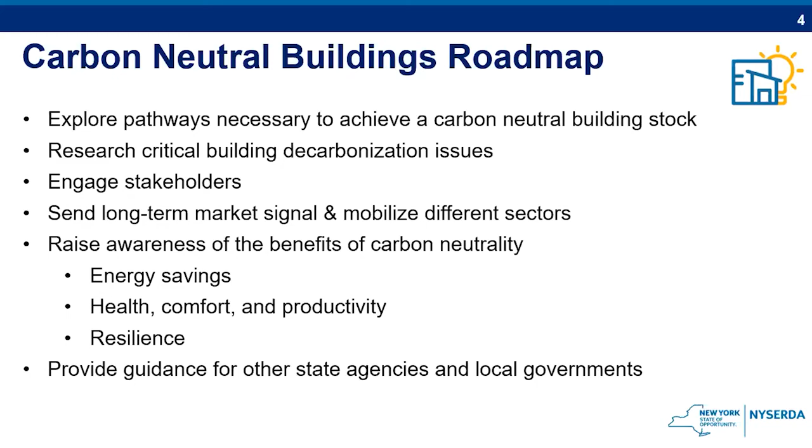We do engage stakeholders. So far, we've had more than 20 stakeholder input sessions to give us input into the development of the roadmap. And as we finish our first draft of the roadmap, we plan on going out with a roadshow later this year to share the roadmap and the key learnings. And our goal is to present the roadmap to the Climate Action Council to drive New York State policy early in 2021.

The roadmap scope, in terms of what we're looking at, includes new construction, as I mentioned, and existing buildings. We are looking at a shift from net zero buildings to carbon neutrality and what that means. So we're figuring that out. And we've picked multiple sectors to start with. We picked single family homes, multifamily buildings, mid-rise and low-rise office space, and within higher education, we picked classrooms and dormitories. We picked these sectors for a couple of reasons. They represent significant portions of the existing and new construction building stock. And also, we believe that they are building typologies where carbon neutrality is both technically and economically possible at this time. So they make good starting points.

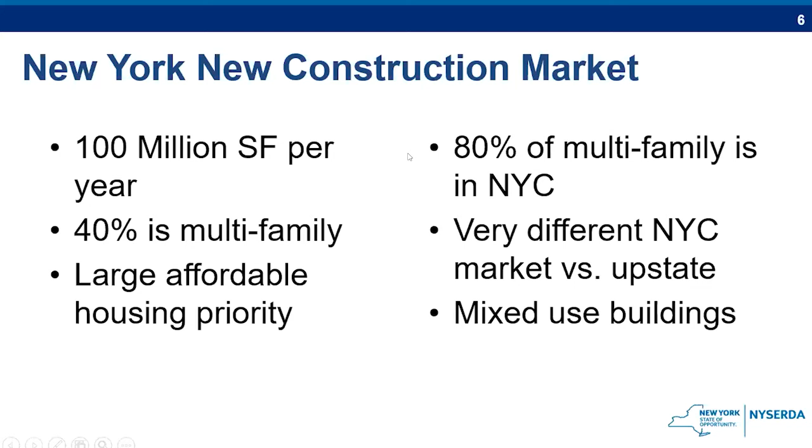We have a shortage of affordable housing, specifically in the Metro New York City area. 80% of our multifamily buildings are in New York City, and about 2/3 of those serve low-income communities. We have a very different market between upstate and downstate.

Upstate, where land is relatively inexpensive, you will see low-rise multifamily units being the primary form of construction. And then downstate, you will see a mix of high-rise and mid-rise, and in certain areas, mixed-use buildings where you have retail and other types of tenants on the bottom floors, and then housing on the top floors. So it's a very different market depending on which part of the state you're on.

Given that multifamily buildings were such a large portion of the new construction market, and given that we could prove not just that carbon neutrality was possible, but what it meant for people to live in a carbon neutral building, we decided in the Buildings of Excellence competition to focus on the multifamily space.

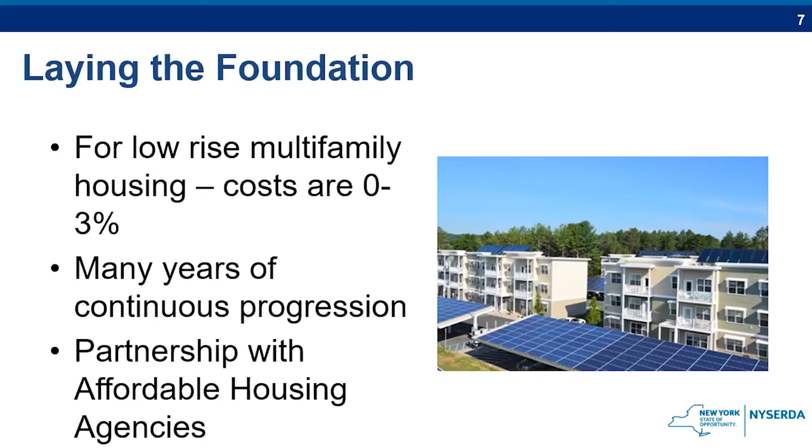So this is an example of a project in upstate, 4-story unit. This project incorporated PV solar and solar thermal, along with heat pumps and instantaneous hot water. The cost, at least in upstate, for a net zero building or carbon neutral building are in the 0 to 3% range. Not for your first project, but more like for your third or fourth project. There is a learning curve, but teams have shown a way to get costs down and improve the mix of technologies that they're using. So that happens to be a project right near Albany.

We have been investing in this area for many years, working with partners to improve our focus in terms of what we're investing in, and the construction methods that the market has been using have been improving. So it's not just incorporation of renewable technologies, but we've made significant improvement in the building shells, and that's one of the key areas upstate where the heat load is such an important part of the building.

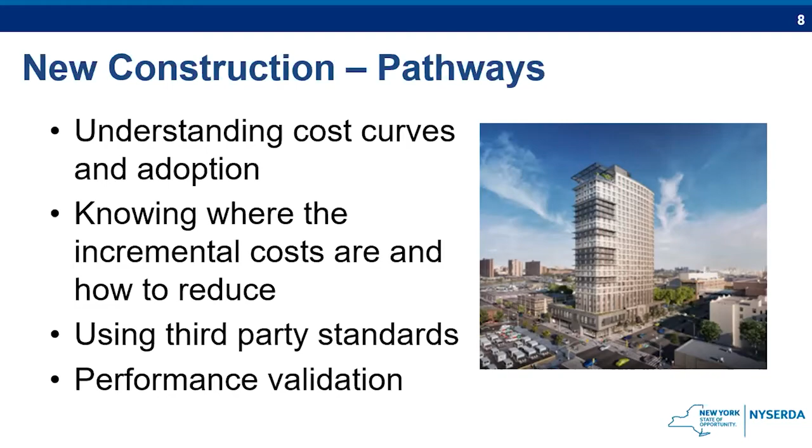Downstate, we've had more challenges with mid and high-rise buildings. The technologies are pushed in some cases to their limits. Projects are more expensive to begin with, so there's more risk associated with moving down the learning curve. We are using third-party standards, and we do performance validation. So we validate the results to make sure that the results that people are claiming are actually being achieved.

One of the things in our Buildings of Excellence competition that's really important is that we are evaluating the results of our partners. We're tracking the technologies. We're looking at the costs in comparison to traditional construction, and we're sharing that information with the market. So in the area of lessons learned and applying what has been done in other industries of construction, here are some of the things that we've learned.

We've learned the value of panelized exteriors with air source heat pumps. We've seen a growth in modular projects, mostly in low-rise and mid-rise. We're looking at low global warming potential refrigerants and low embodied carbon. We've actually begun to see some high-pressure carbon dioxide systems in some of the Buildings of Excellence competition winners.

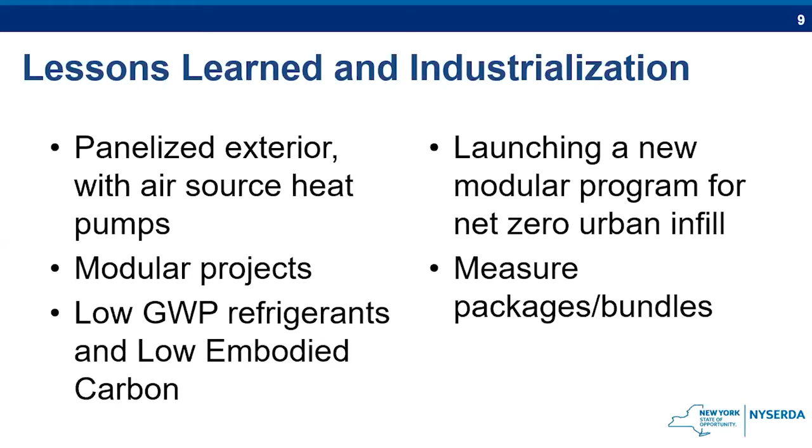We're launching a new program to focus on net zero urban infills, and that would be one of the areas where we see growth for modular. And then we're developing measure packages of bundled measures so that we can focus on getting scale for provable packages of low emission, low energy performance.

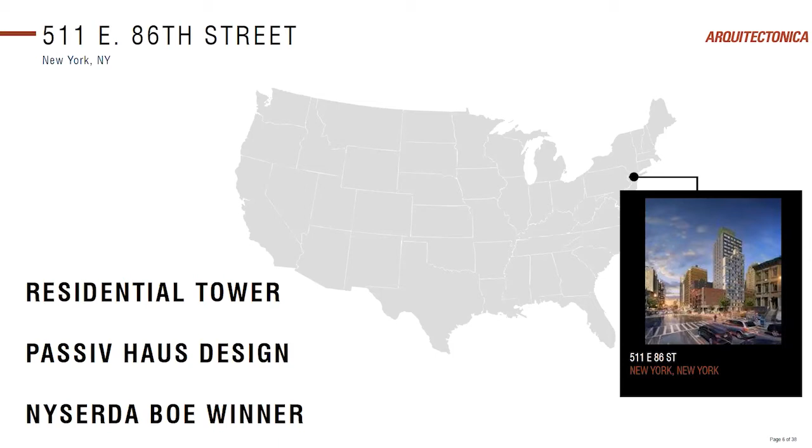So it's hard to really get that building, but this is going to be one of the buildings we're going to talk about today. It is one that we're very proud of here in this office at Arquitectonica. It is a residential tower in New York City. It is a passive house design and is a NYSERDA Buildings of Excellence winner.

The success of every project is a direct relation of the project team. From owners, designers, and contractors, each member of the team has to have the project goal in mind. If not, it doesn't work. From the design drawings, making sure the QA/QC on the design drawings is very tight and very coordinated, to the QA/QC in the field. It's very important.

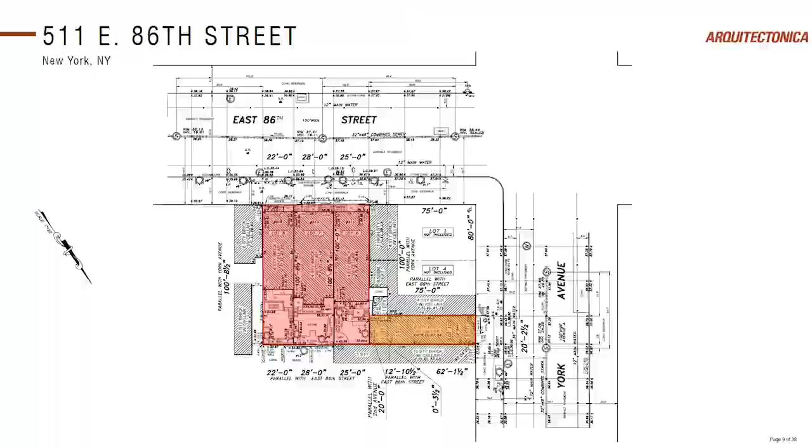The survey of the site: it was 3 former separate lots with low-rise, inefficient buildings on them. The owner approached us to combine these 3 lots and make a tower. As we started the project, the owner actually purchased the orange lot you see here, so it created an interesting dilemma for us. This additional lot, although we always welcome more project or more scope, is a sliver building lot. So when we first started designing this tower, it was on these existing lots, and we always designed from the inside out.

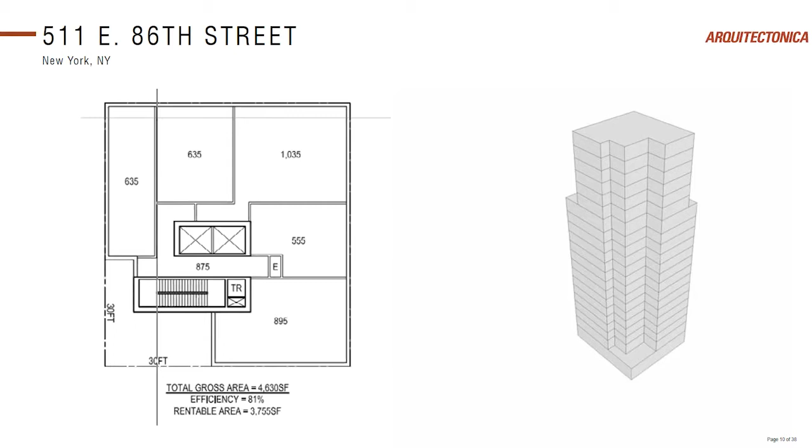Typical massing extrusion. We usually start with New York City zoning. What the New York City zoning told us about this lot is it could be 230 feet high above the base plane, has mandatory quality housing, and an optional bonus 2 FAR for inclusionary housing. This is the first hardline approach we did on the project, very, very early. You notice here, the original scope is not including that little L. When we added this lot, we tried to keep the centralized core where it is right now. And as you see, as we go through the plans, it really didn't move too much.

As we were in the conceptual phase of this project, we started to list all the requirements. As we start to draw, what are the requirements for the project? And here are a few. We have the United States Access Board, New York City Building Code, New York City Planning, Multiple Dwelling Law, contract. And as we started going through it, the owner started piling on more items to include, and included passive house.

So although we never did a passive house project in this office, we're familiar with passive house standards. And we also noted that we want to go for a NYSERDA Buildings of Excellence competition. And also what he added, as you can see, New York City Department of Finance on the left, he also added that we want to go for the 421A tax program, which then triggers UFAS units, HPD requirements for affordable units.

So all this piled into the building, and we needed to educate ourselves on passive house. So what's the first thing I did? I took a walk over to the Strand bookstore in Manhattan, and I bought a couple of books. Several of us got passive house certified. I wasn't so lucky, so I had to do it from a book. And this is what was the yield of the project. Not taking you through all the design process, which took months, almost 2 years from start to finish.

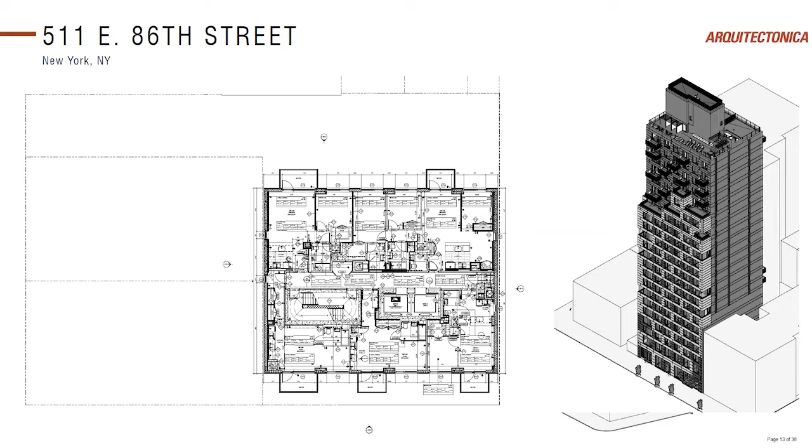This is the result. Here we have a typical tower plan and a typical tower axon. As you can see, the core is centrally located to make sure the floor plate is very efficient. As you know, real estate in New York is very expensive, so every inch is rentable. And a typical tower upper plan with our facade undulating, and you can start to see where the zoning setbacks come into play and where we start to implement dormer law, which allows you to articulate the facade in a certain way to make it a little interesting. So it's not a real start and stop from the base of the tower to the upper portion of the tower.

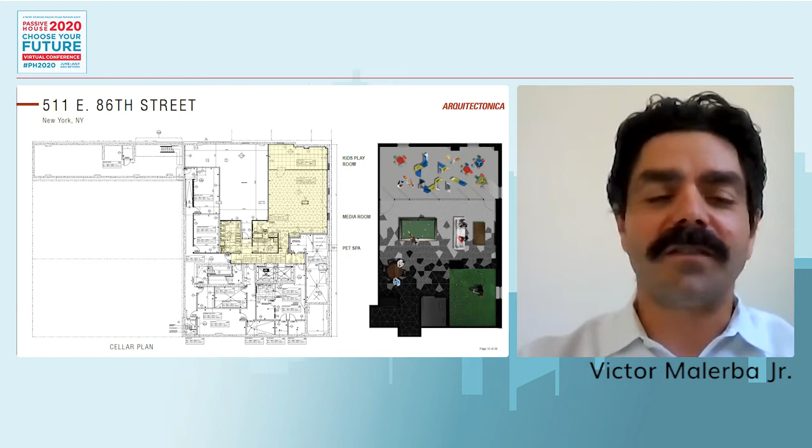Getting into the program a little bit, our cellar level included some amenity space for the residents, which needed to be included for quality housing. We have a media room, a kids' playroom, and also a pet spa. So any occupant of the building who has a pet can come down here and wash their pet. As we can see in some of our buildings, the amenities are getting more and more specific and more interesting.

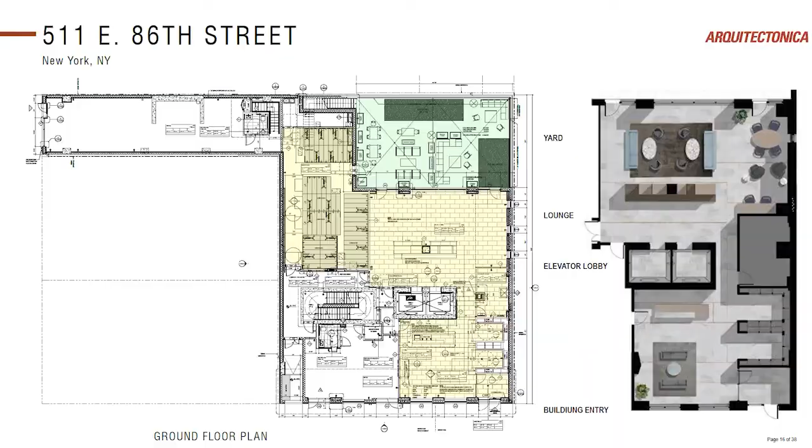The ground floor, which is our building entry, houses our entry lobby, our mailbox area, our concierge desk. And we did something interesting here. Since the core is located centrally, and it is a very tight footprint, instead of creating the concierge desk more towards the front of the building, we opted to wrap around the core and have the elevator lobby on the back side, which created a nice little lounge and also incorporated an outdoor yard area with some bike storage, which was mandatory for this project.

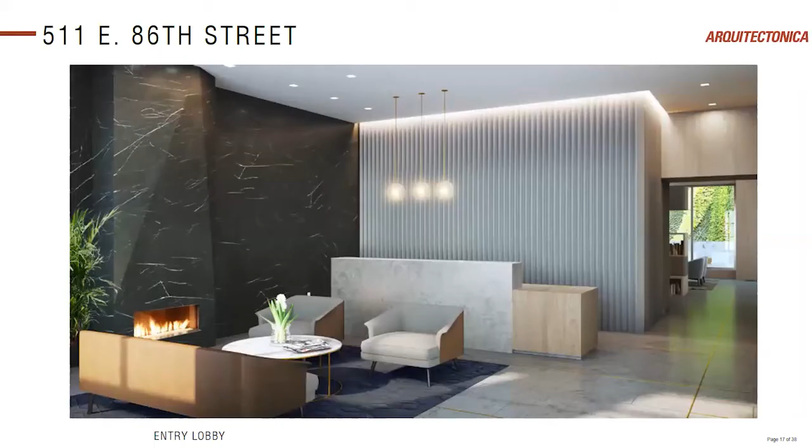And here we have some renderings of our interior lobby. Unfortunately, this project is still in construction, so I don't have any final shots, but I'm hoping they look like this. As you see here, as you enter, we have a marble wall, and then you wrap around the back to get to the elevators. So you don't see where the elevators are. They're hidden in the back, and it creates a nice kind of living room feel to this building as you enter. Very homely, especially because it's a residential building.

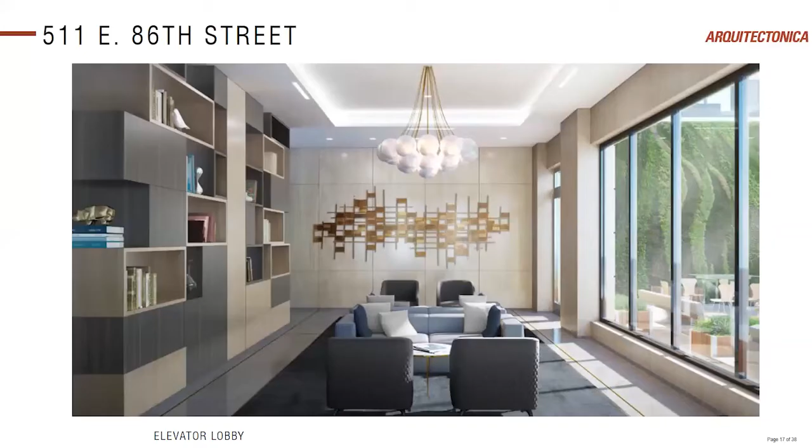And behind those elevators, the elevators on this slide will be behind the bookshelf to the left, we created another lounge area, which gives occupants a place to sit and repose, and also opens up to the outdoor garden. Our second floor plan houses the start of the residential units, and also another reading room or slight lounge to the back of the building.

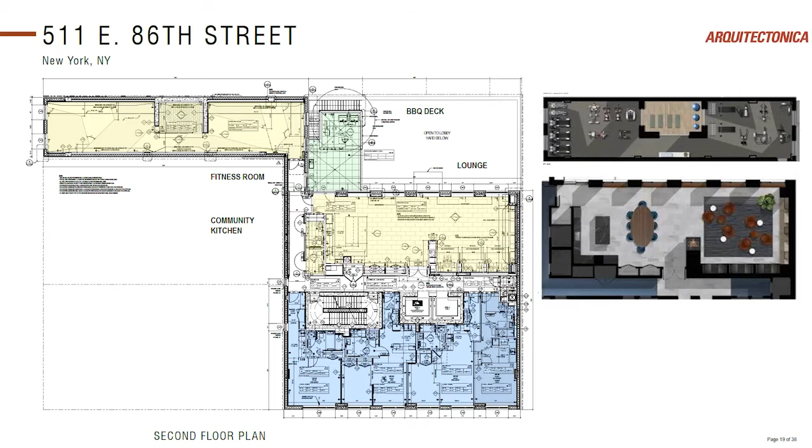The elevator floor connects to a barbecue deck, where residents can barbecue, and also our fitness room. We locate these at the base of the building because usually people want to be higher in New York City to get more views. So this is a perfect opportunity to locate amenities at the lower level. Here's a rendering of the second floor lounge area and reading room.

What's interesting here is we start to talk about passive houses. The fireplace originally specified was supposed to be gas, but being combustible, we went with a water vapor. If you haven't seen a water vapor fireplace, I implore you to do so. They're really quite interesting and actually do look like fire. And in the background here, you see the kitchen area, where it's a community kitchen. So somebody could come down here, maybe host a party or lounge.

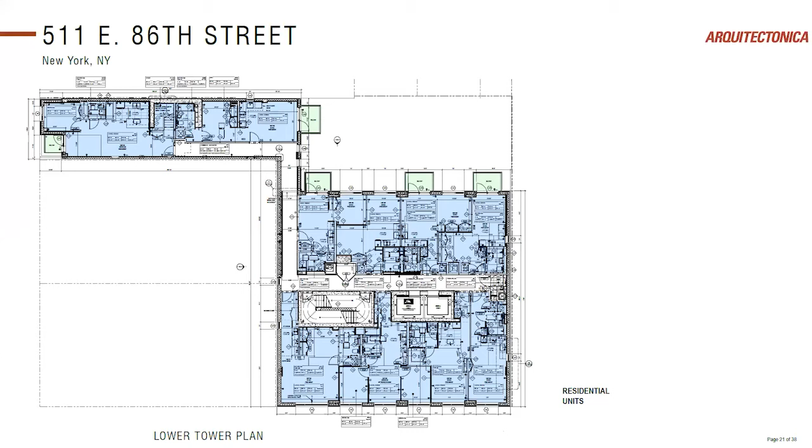As we move up through the building, the residential units are pretty typical per floor, but also start to change from 1 bedroom to 2 bedroom and some studios. Here we have a typical tower building, residential units, with balconies off to the front and the back of the building. Here you see the sliver building. You can really see how tight that sliver building is. Sliver building law is a lot that's 45 feet or less. This is pretty tight. It's a pretty tight lot, but we made it work with our centralized shear walls for structural stability.

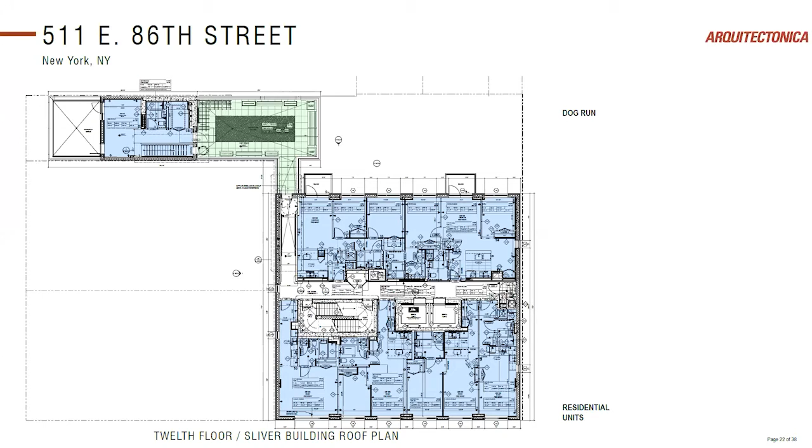On the 12th floor, which is the roof of the sliver building, because we're maxed out on height there, we put a dog run where occupants who have pets in the building can allow their dogs to run around and get some amenity space. Every inch of this building is accounted for, whether it's on the floor plate, on the balconies, or any of the roofs. Most of the roofs here, except for the penthouses that are mechanical, are activated.

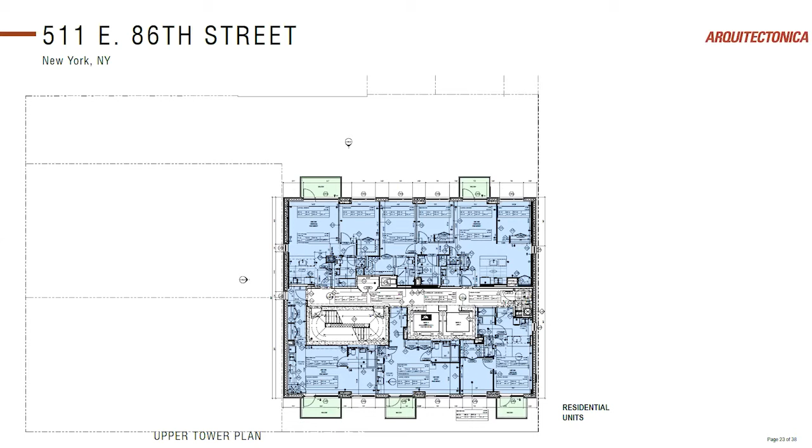Here's a typical upper tower plan. As you can see, the centralized core and the scissor stair, which is allowed in New York City for residential, really centralizes and gives the floor plate very high efficiencies, extremely high efficiencies. The balconies on the front and back allow tenants to get outside and get the wonderful views in New York City.

And speaking of views, the roof plan was almost 100% activated. Really, really tight coordination on this, where we utilized Revit and BIM to coordinate the roof plan. So every little square inch that we could use for recreational space was actually used. And here are some photos that I took at the topping off ceremony. And now you know why. That roof deck is going to have amazing views to the north and south through Manhattan.

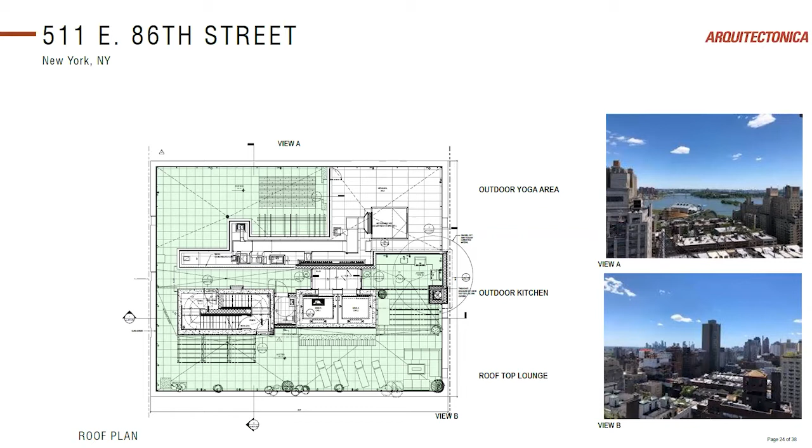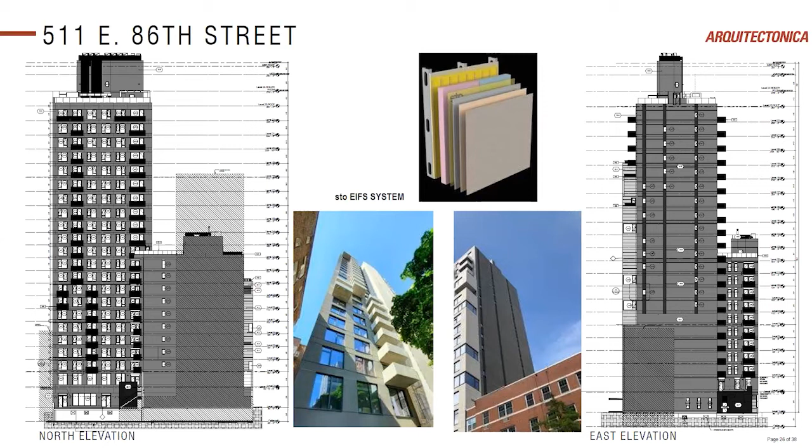On the other facades, we applied EIFS. Because of access and because of non-street frontage, EIFS is a very efficient exterior envelope system, which allows for full continuous insulation and air barrier applications. The maximum building height was 230 feet, with setbacks provided for zoning. As you can see here, we start to articulate the facade for setbacks for zoning, but you don't know there's setbacks for zoning. We didn't want just a dead stop from the lower portion of the tower to the upper portion. We wanted to articulate that with balconies and setbacks.

The building envelope facing the streets is a well-insulated rain screen system with large porcelain panels offering long-term durability and low maintenance. Walls facing the backyard are covered with a highly efficient EIFS system. Large operable windows offer plenty of natural light, fresh air, spacious feel, and connection to the outdoors in all apartments. Tenants will be able to enjoy views of the East River from private balconies and public terraces.

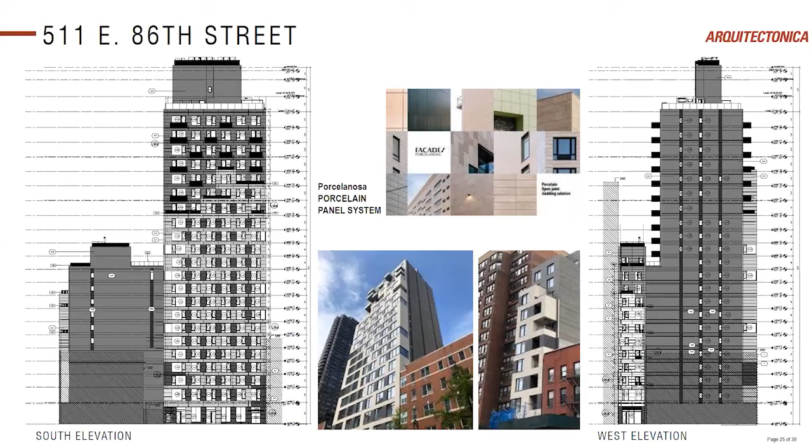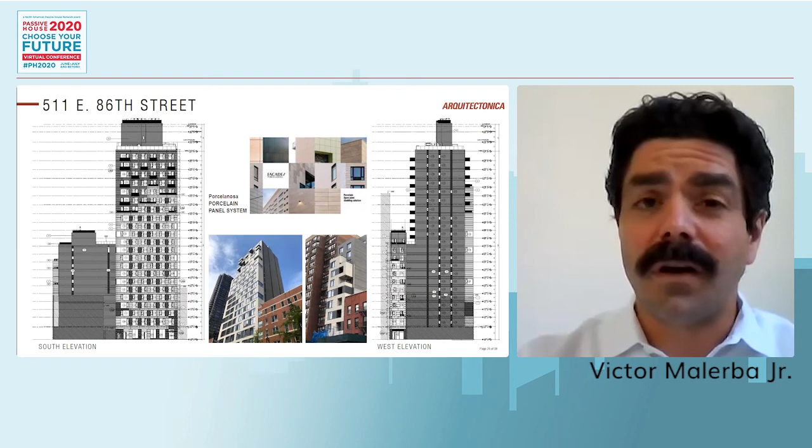One of the defining characteristics of the building is the thermally broken cantilever balconies. This was always a wish list item for us architecturally, thermally broken balconies, because there's nothing like standing next to a balcony and having a cold floor, especially on the Northeast coast. Now, as we started to design this building, we started to implement the Passive House requirements. And Passive House is a very interesting standard because it's performance-based.

We have prescriptive-based options when designing buildings, but performance-based actually gives us real results. As Patrick was talking about earlier, there's measurable results when you build your building with the Passive House standard because you have to fit a criteria. If one is a little bit lower than the other, you have to decrease the other one. But these are some of the features that are in our building currently, or in our building design and being

implemented over this project. The suite of high-performance strategies implemented on this project were developed and evaluated through the iterative design process involving all members of the design team. As you can see here, it's not just architecture, it's MEP, engineering, structure, everybody. The highly insulated and airtight envelope requires Passive House certification, utilizes aerated concrete block for structural and thermal properties, triple pane glazing, and a combination of a liquid applied air barrier and high performance air sealing tapes. The blower door test was something to be seen.

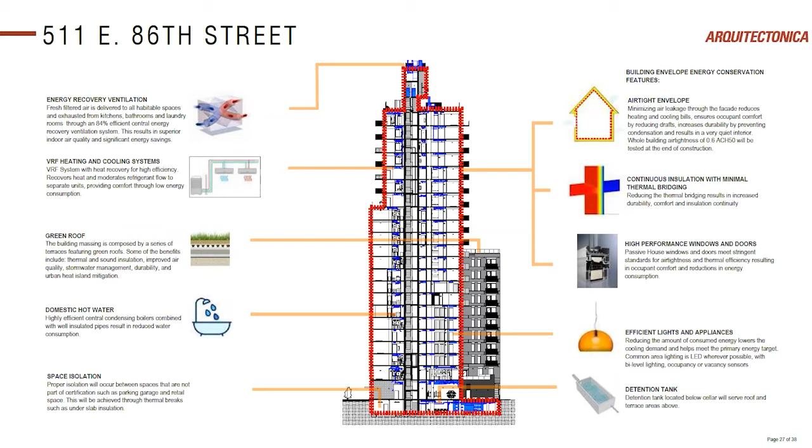Heating and cooling are provided for all spaces via an air source heat pump VRF system with heat recovery for maximum efficiency. A separate centralized ventilation system circulates fresh air to all living spaces and amenities with over 80% efficiency energy recovery ventilators and demand control with CO2 sensors to increase energy savings. In addition to these elements, Energy Star appliances, LED lights with occupancy controls in common areas, and condensing boilers all contribute to a state-of-the-art low energy building.

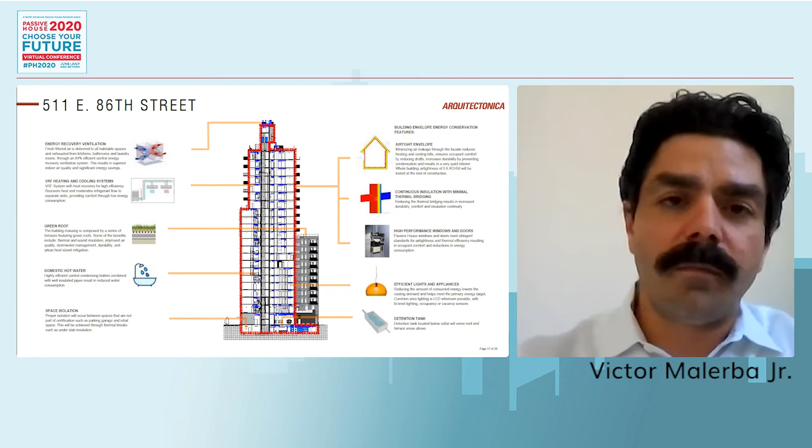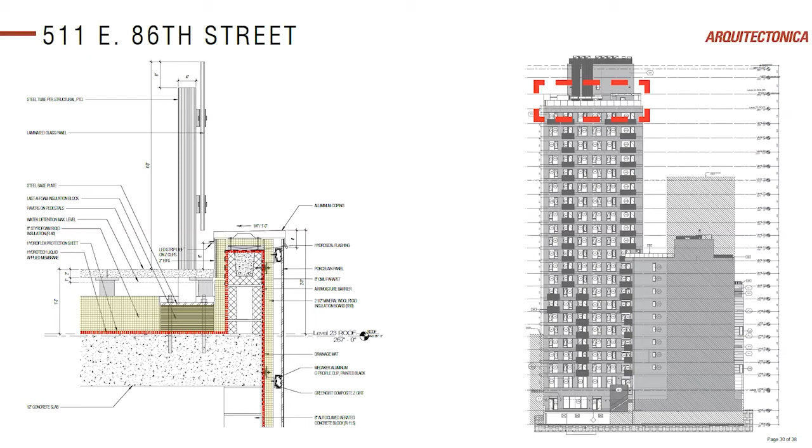Here's where the details get a little interesting, for me especially: how do you continue that air barrier or that waterproofing membrane to wrap and continue? And also, if everything is connected to the deck, how do you block it? So what we did is we actually used insulated blocks, or Last-A-Foam insulated blocks, which are structural foam blocks that actually create a thermal break with anything mounted to the slab, so you don't have that thermal conductivity. Interesting detail, very simplified here, but took a lot of time to work through.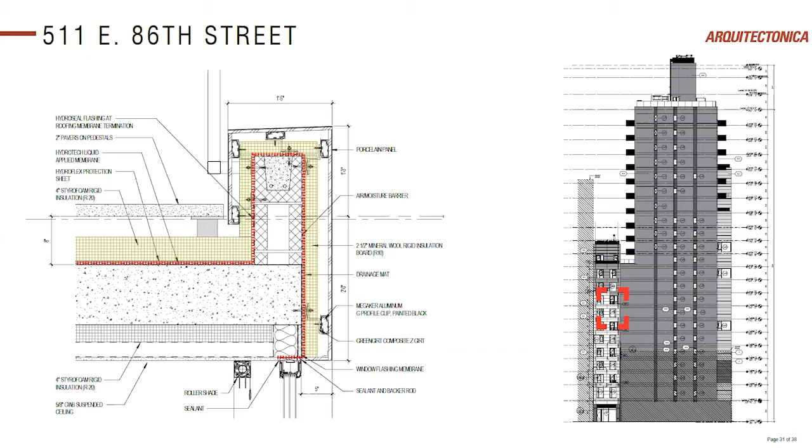Another detail here is a window head detail to the roof, which shows our continuous insulation wrapping the coping and continuing down. Again, another simple detail, but it took a lot of effort, as all these elements need to work together, be in sequence, and be installed properly. Here's one of our more interesting details with our thermally broken balcony. Since this project, I've tried to do thermally broken balconies on probably every project with a balcony, and it always gets VE'd out. I'm glad we were able to make it work here. And hopefully when we start getting performance criteria for this project, we'll implement them more and more.

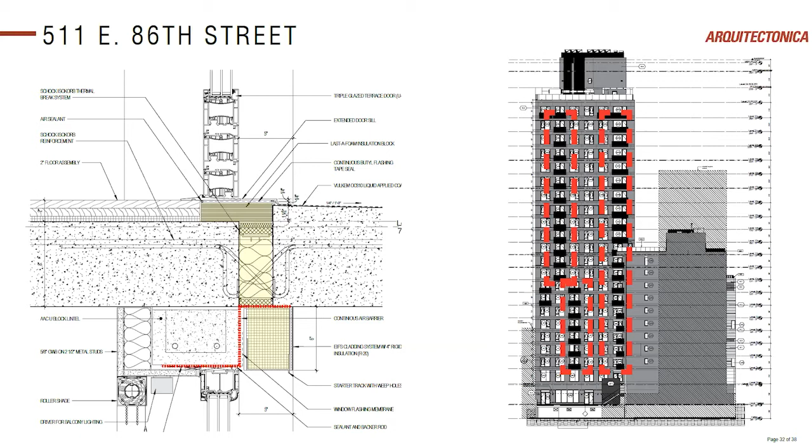Here we see our triple glazed terrace door, and our Last-A-Foam insulation block to support that door. Basically a Schöck Isokorb thermally broken balcony connected there, with also a head detail and insulation. And don't forget our continuous air barrier. Here are some of the products we used on the project that were not new to us, but we always want to implement. It seems like we threw everything at this project because it was Passive House. It needed to be highly energy efficient.

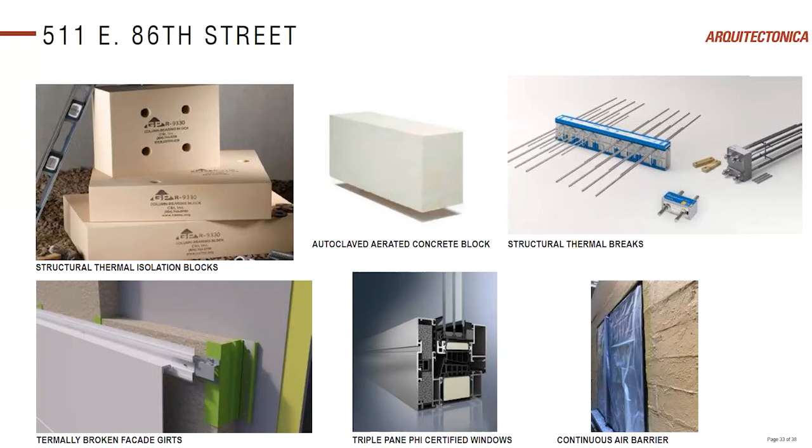Our structural thermal isolation blocks, which I'll probably use in every project since. Our AAC blocks, which are a high R-value block. Structural thermal breaks, thermally broken facade girts, triple pane windows, and our air barrier. What does this all mean? We have to quantify it for the New York City DOB to evaluate and approve, and also for NYSERDA to review and approve. This is our COMcheck sheet.

Very simple COMcheck. I actually had the team run this COMcheck probably 4 times, because every time it spit out the numbers, I couldn't believe the values here. I believe this building was like 40% higher than the actual energy code required for New York City at the time of design and submission to DOB. Really, really interesting stuff.

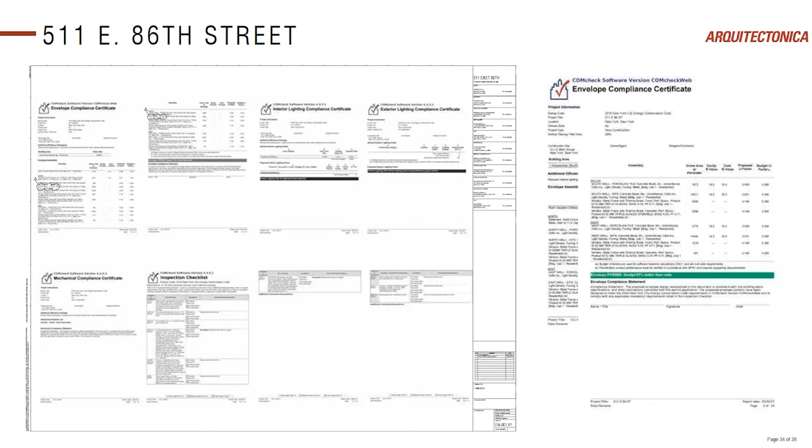As we get closer to energy codes being more stringent, that number decreases, but for this type of building and these construction methods, it's really nothing to worry about compliance. You just have to show it. So here for me is where the rubber meets the road. Here's a rendering for May of 2016, and here's a project of May of this year. The rendering really captures the design essence, but also the project was implemented almost to the T with the rendering.

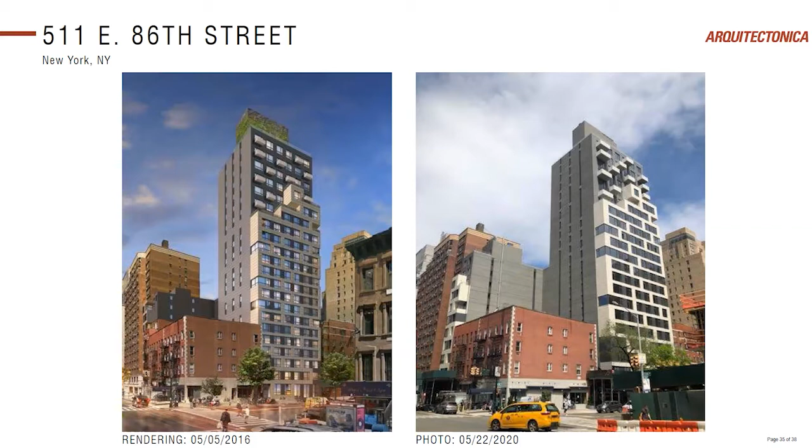And this is how we measured the success of a project. I think it's a Curbed website, forgive me if I misquote that, does the comparison from rendering to real life. And I think this one is something actually we'd send them because it actually came out pretty well designed, pretty well executed. Another rendering of the facade, rendering done on May 5th, 2016, and a picture taken May 22nd of 2020. As you can see here, the execution was pretty spot on.

From the very inception of the project, the ownership team had very few fundamental ideas that influenced every aspect of the design. They wanted to create a building that would provide a healthy and comfortable environment for its tenants and owners, while drastically reducing energy bills and creating profitable investment far into the future. The 511 East 86th Street project is a 140 unit, 140,000 square foot apartment building under construction in the Upper East Side of New York City that is designed to Passive House standards, and also was submitted and won the Buildings of Excellence Award from NYSERDA.

Using integrated project delivery along with passive design principles and efficient mechanical systems, the project will achieve significant energy savings and high occupant comfort while overcoming inherent design hurdles, all without compromising the architectural design intent. And the renderings really prove that, and the award really proves that this building is state-of-the-art, but also can be easily repeatable and designed to a high standard. Thank you very much, and now I pass the presentation over to Stas.

Thank you, Victor, for that great presentation. So my name is Stas Zakrzewski from Z+H Architects. I'm a principal here at the firm, and I'm going to be giving a little bit of background first on our firm, where we're coming from, and some of our projects before I dive into this Buildings of Excellence project.

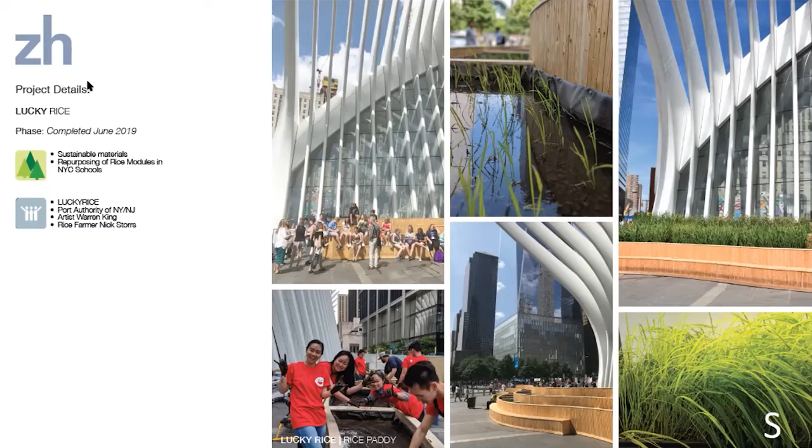So this is the Lucky Rice Pavilion. It is a mass timber project that we built last year. It's all prefabricated, made in small components, and it's showcasing the importance of rice in our world. And all of these component parts of this temporary pavilion have been taken apart and then brought to New York City schools in the area and reused and recycled. So I talk about some of the different ranges of sizes of our projects.

So this was in 08-09, and as you know, this was a time of recession. It was a crisis. And of course, I had a little bit of extra time on my hands. So I was, at the time, a little bit frustrated with the fact that as architects, we're not always trained to think about the performance of our buildings.

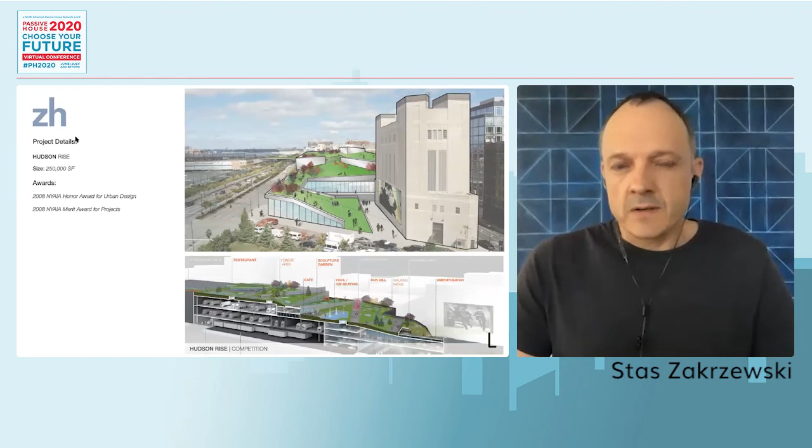There's so much focus on some other aspects which are important, but how is it that our buildings really work? And so I decided to enlist in the Certified Passive House Designer course in 2010, and I really was amazed at how little I felt I knew as an architect about high performance buildings. And it put me on a voyage to really investigate this.

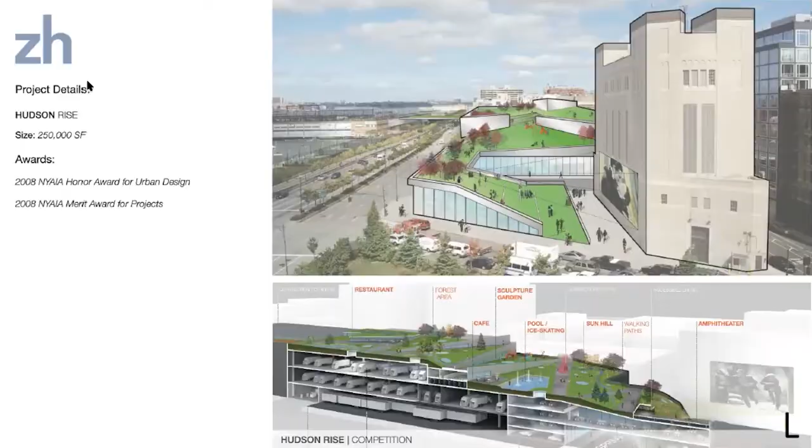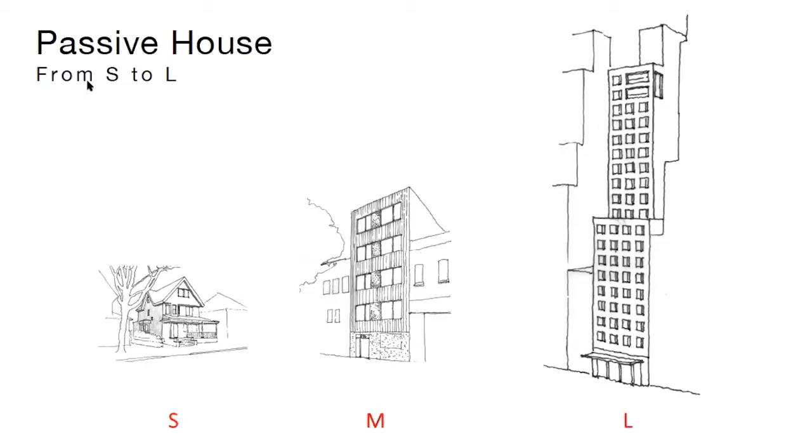And I started to sign up for a lot of these different conferences. I went to Europe a number of times. And we decided to really focus on this in our firm from then on. So a number of us got certified in the firm. And we're really, really fortunate that today we have a number of different scales of projects that are all certified passive houses or close to being certified. And that experience has led us to this larger building that we're doing.

So, for example, at a smaller scale, there's a single family residential building in Ditmas Park in Brooklyn, a condominium at a medium scale. And again, at the large scale, this is Flo Chelsea, which I will be talking about further today. All of these are in various stages of getting certification, either as a new building or as an EnerPHit project. An EnerPHit is a project which is a renovation of an existing building. And this building was 3 stories, and we completely gutted it and changed it. And it just shows that you can completely rehabilitate some of these existing buildings.

So last year we applied with 1 project that was in construction and 1 that was in design. And we were very fortunate to win an award in both projects. So one of them is the Street Smart project, and the other one is Flo Chelsea, which we're going to focus on today.

So this project began in 2014 when I was approached by a group in Midtown Manhattan, and the Bernstein real estate family have owned a number of large-scale commercial buildings for many years. And their portfolio includes buildings mostly around the Madison Square Garden area. And they happen to have a series of buildings in which they were able to get a lot, a parking lot that came with the building at the time. And the zoning had recently changed. So there was an opportunity to do a new building there.

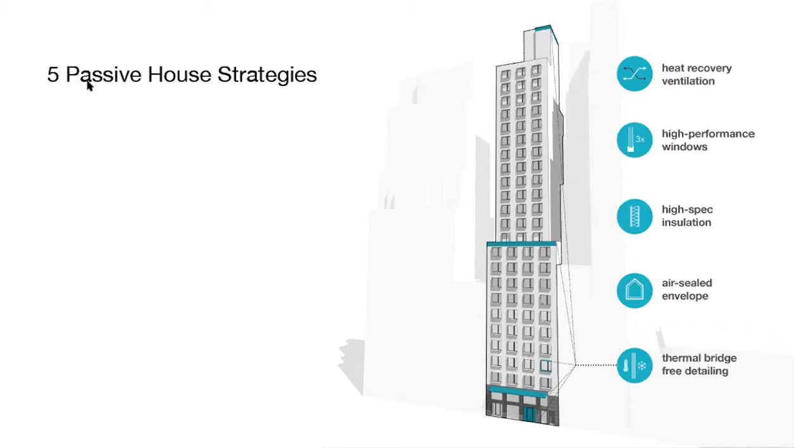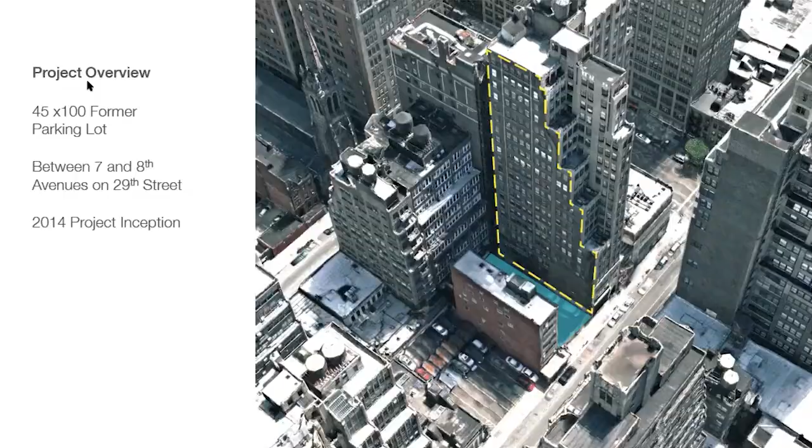So looking at the lot again, one of the challenges that the Bernsteins presented to us was, well, how are we going to safeguard all of these lot line windows that are in my office space next door that have all this rental income? And so we developed a number of different schemes with varying zoning envelopes. And what we came up with was a base building that occupied the first floors, half of the building.

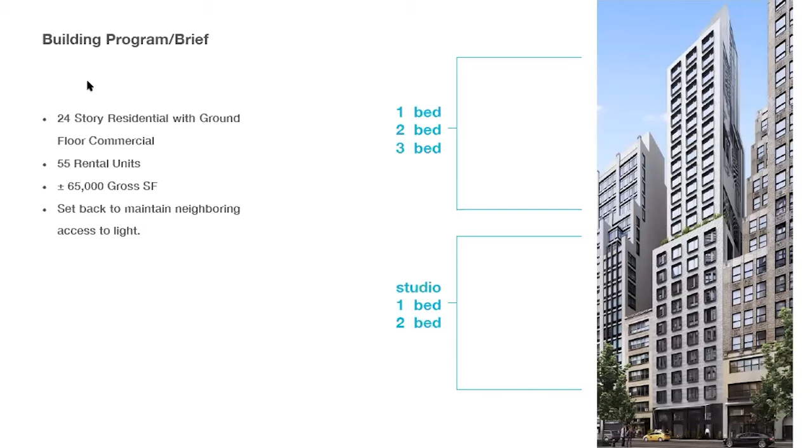And then, instead of doing a 20-story building that went the full width of the site, the site is only 45 feet wide, it's quite narrow, we scaled it back and we went up higher. So we played a little game with the floor area and squeezed it to be able to create a more exciting shape, but also to safeguard a lot of those windows that were facing west from the offices.

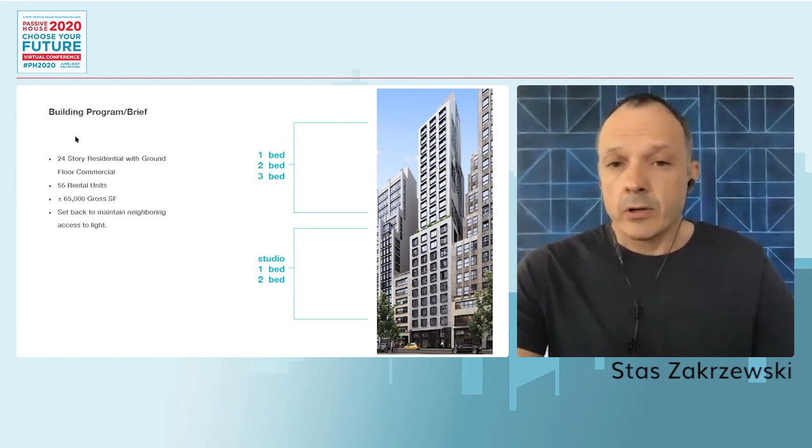And then we added one other feature, which was inviting an artist to come in and paint a mural on that side of the building so that those neighboring offices were looking into something that was going to change. So on the lower floors of the building, we have studios, 1 bedroom and 2 bedrooms, and on the upper floors, a range of 1, 2, and 3 bedrooms. So there are some floors in that tower that are full-floor units. Pretty amazing units.

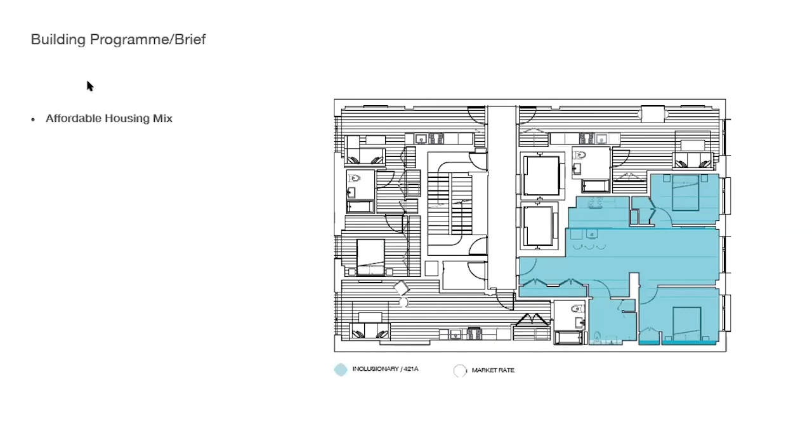This is a typical floor plan on the lower part of the building. So you've got the affordable unit there on the lower right-hand corner, really generous size rooms, a studio on the lower left-hand corner, and then a 1-bedroom there. So 4 units in all, and it allowed us to have that variation of typology that, of course, all of these city rental buildings are looking for.

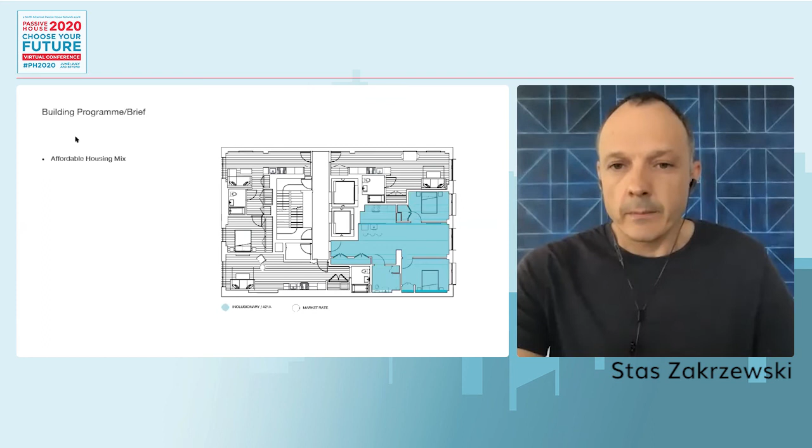You have to have a variation so that as you bring people in, they feel like they have something for them, that it works for them. In the affordable range, out of the 55 units, 17 of these units were affordable, and they were spread throughout the building.

So there's some very, very lucky people right now who've applied. I think it was many thousands of people applied, and I understand that the folks have been selected now to occupy the building, so that's great.

So in terms of our design element and focus on this, our firm is really focused on creating light-filled interiors with variation and as large a window as we could get. And of course, this is kind of counterproductive, especially if you have a south-facing window. So we designed this special shading system on the outside that I'm going to show in a few minutes that helped us achieve that. Flowing spaces from the kitchens to the other living room areas, but always trying to connect to the outside.

A little feature, this is the mural. These are the guys who came over from the Netherlands. They did a really cool video. You should check it out on YouTube. And basically it's their process, and they have this video of the whole thing, and they engage how this building is this energy efficient building and how they're going to make their mural part of this portion of the building.

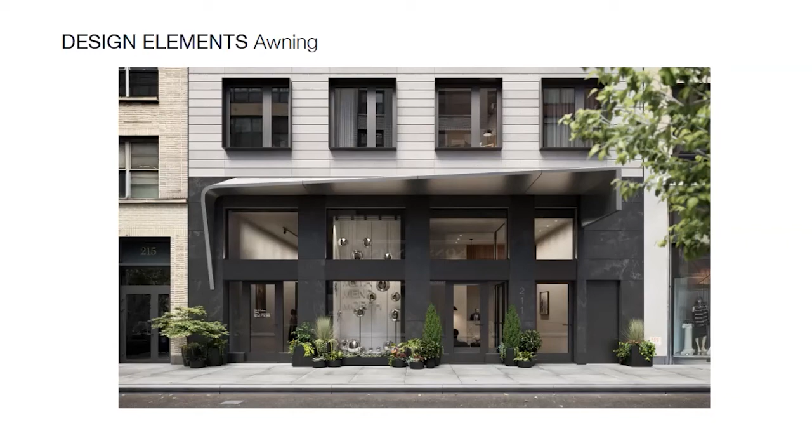So the other element that was really important was the whole entry sequence. We have some really nice materials selected for the lobby area, these really nice wood and stone materials, and creating a really tall ceiling, a double height ceiling. But of course, all of that ceiling height produces a lot of heat gain. So what can we do about that? Well, we created an awning structure. This is it in the design phase.

During construction, we made some changes to it, and we brought some of that wood material that was inside to the underneath of this canopy, and we adjusted its shape, and it creates a kind of a dynamic, custom, bespoke awning or entry that's more inviting to people coming over from 7th Avenue.

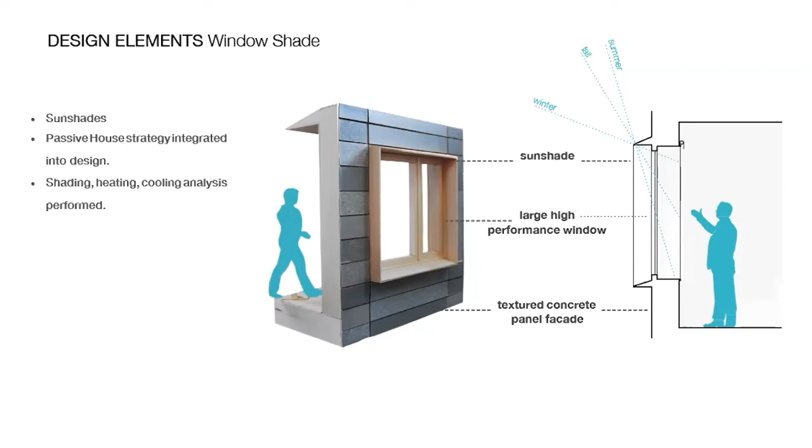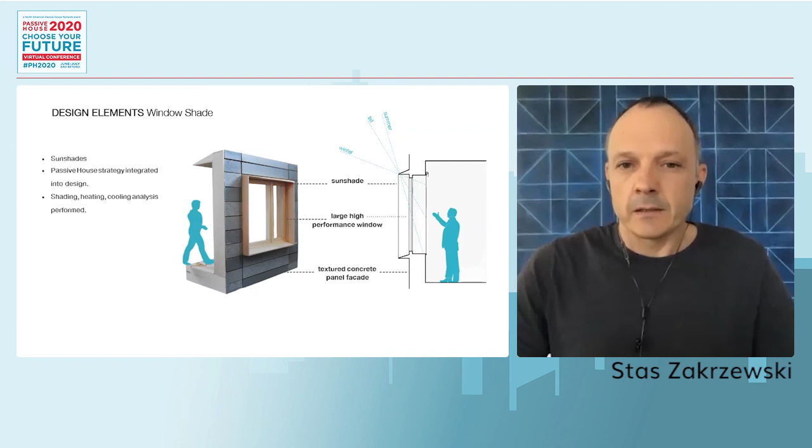So here we have the design elements, the window shading system on our building. And we have a unique shading device that comes out from the building surface and provides us a reduction in the amount of sunlight that comes in during the summer, but still allows lower winter sun to go into those interiors. Those shading devices are finished with a metallic finish, and they are a counterpoint to the cement board high performance panels that are the rest of the facade system.

And what's interesting about them is, depending on the time of the day, the shadows from these devices and the colors that are in the sky reflect onto the materials of the building. So we're really happy with the facade. We're getting a lot of compliments about how this building looks in the street.

So with all of these other projects that we've done, a lot of people are asking us, what is the difference between these smaller projects or mid-range projects and these super large 20-story plus buildings? And the changes are quite significant. So I've listed out a few of them, I think 4 or 5 of them, and I'm going to go through them just to talk a little bit about the changes.

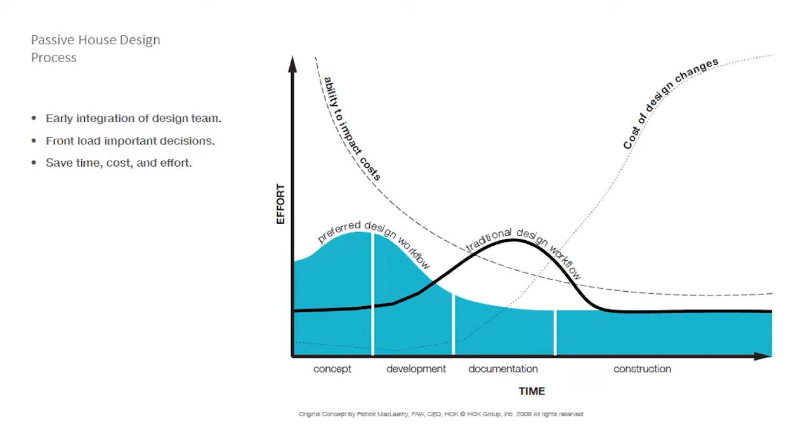So first of all, we need to have a different team set up. Normal buildings, you have a certain amount of collaboration. Well, with a passive house envelope, you really need to be doing that much more collaboration early on, because you have to integrate so many more metrics of energy into the equation. If you do that, you're going to have much more successful projects, and you're going to have a lot less changes during construction. And we don't like changes during construction. Architects don't, developers don't, contractors don't.

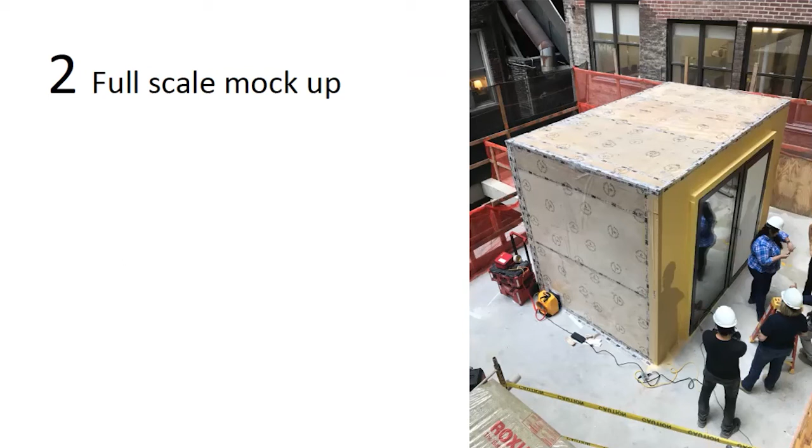The second thing is doing a full-scale mock-up. So on a smaller project, you can experiment, you can do your testing on the facade. Well, I would recommend on the larger buildings that you always do a full-scale mock-up. And it's not just for looking at this, it's actually a training tool for all of the contractors and subcontractors. So here's a photo of all of these folks looking at the details. We'd actually make them do the details themselves, making sure they have it right. And then that was our standard. So then we would go through the building and say, look, you've missed these little areas here. You've got to redo the air barrier.

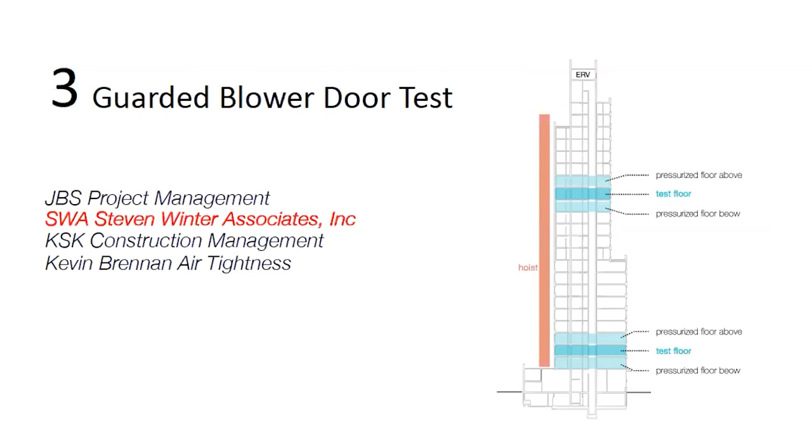This is the type of extent of work you have to do on these larger buildings. The next big thing was the guarded blower door test. So on these large buildings, because you have a hoist going up behind the building, you can't do a proper blower door test mid-project because half your building is open. So Steven Winter did a great job in this project in creating 2 or 3 floors where we did test floors, and we pressurized the floors above and below so we can see how those floors were performing. And they both did well, so we knew that what we were doing was working well.

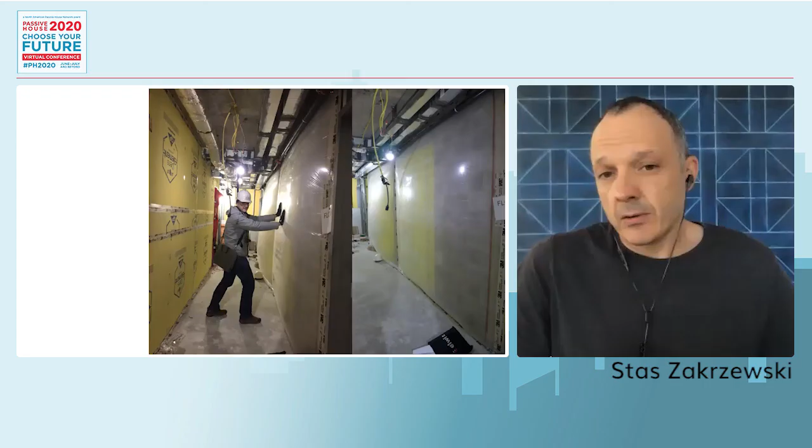And this is just a funny photograph of me. I was in the testing floor, and this is the air pressure that's coming from the floors above and below in through the elevator core. And you realize the sort of pressures, and these blower doors don't lie. It's going to tell you how much air is coming out from your building.

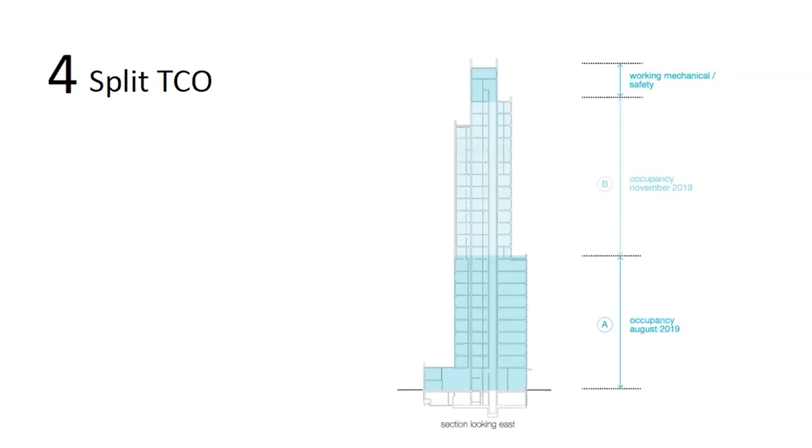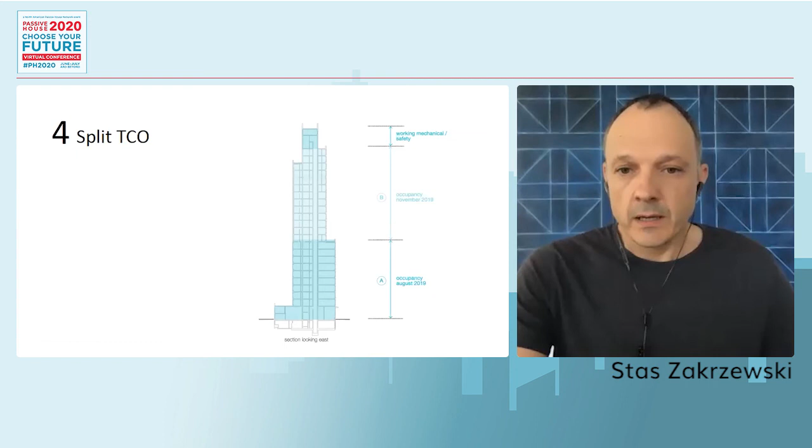The other thing that was really, really difficult for us is halfway through construction, we were told we had to do a split TCO. And this was a real problem because it's one thing to do this on a normal building. It's another thing to do it on a passive house where you have to do a blower door test. So at first we said it's going to be impossible. But after about 2 months of going back and forth, we did find a way of doing it. And literally the week before people were going to move in, we did a final blower door test, and we got a great number, 0.35. So our understanding is this is the first time this has ever been done. So we're really excited.

And so I wanted to just talk about the Buildings of Excellence and where we are. When we were in construction, this was announced, and it seemed like a really great opportunity to submit for this until we found out the requirement that our building had to be 5% better than what we submitted to the DOB. And you have to understand, we had already submitted a really, really good passive house building to the DOB a year and a half before. And now we had to do 5% more. And we were like, oh my God. So how were we going to do this?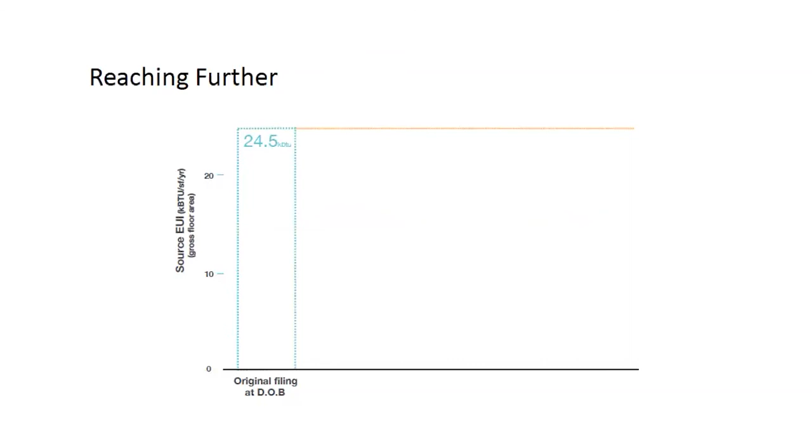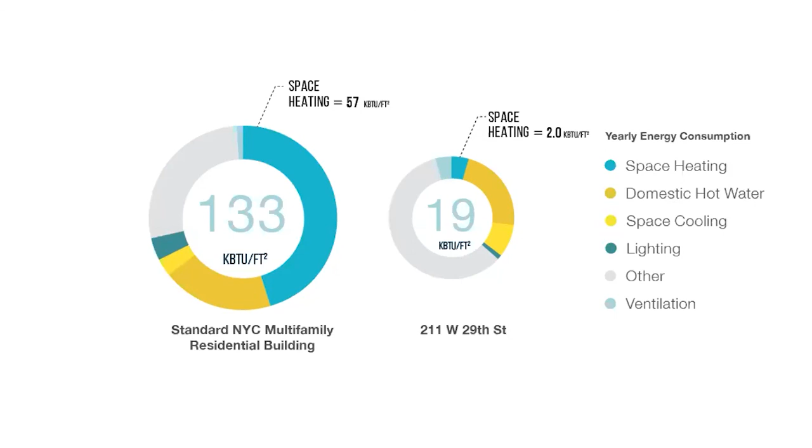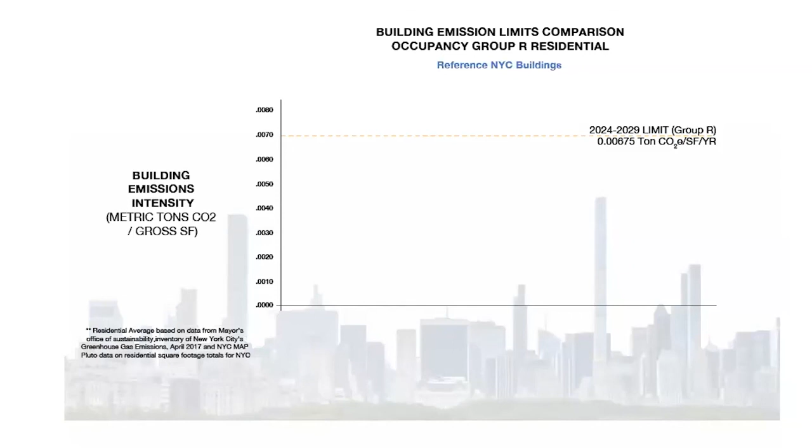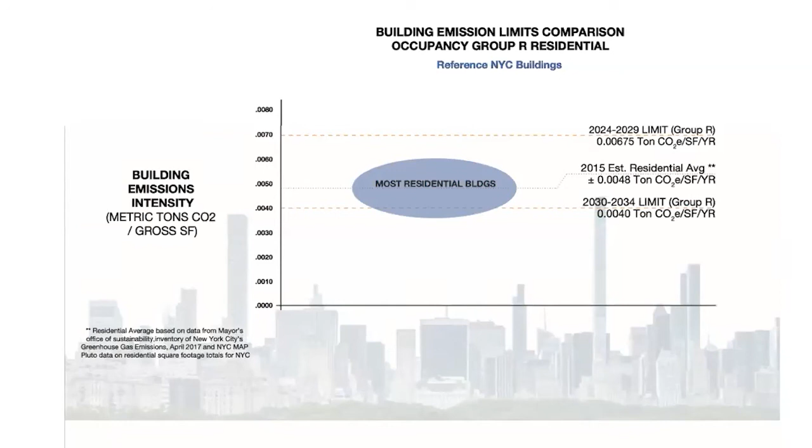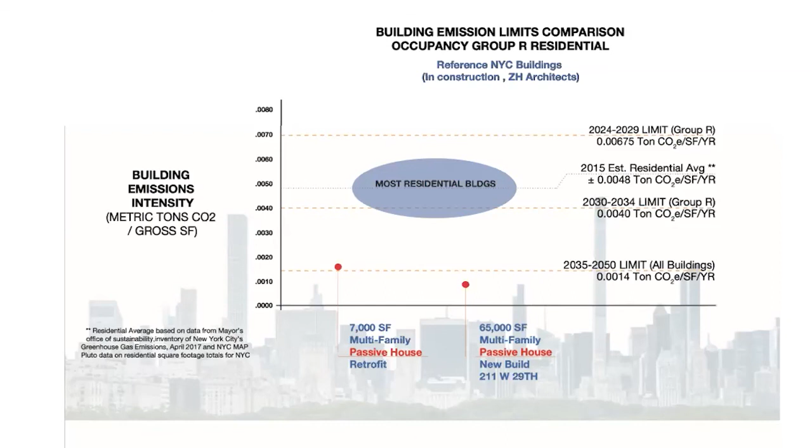So lastly, I want to talk about the Climate Mobilization Act. This was enacted last year, and it is going to require buildings to monitor their emissions, with emissions requirements starting in 2024. A lot of residential buildings are below those requirements, but it's getting more and more stringent in 2030, and in 2035 to 2050 it's even lower. And you can see where this building is. It's below the 2050 limit requirement. So that's pretty amazing. And also good to note that a retrofit of a building can be done to these limits as well.

So in finishing, given these times we're in with the COVID realities of how we're having to reinvent ourselves, we should take the opportunity to look at this and ask, why can't we build all of these buildings this way? It's at a very small, minor cost increase, and we believe it's really worth doing.